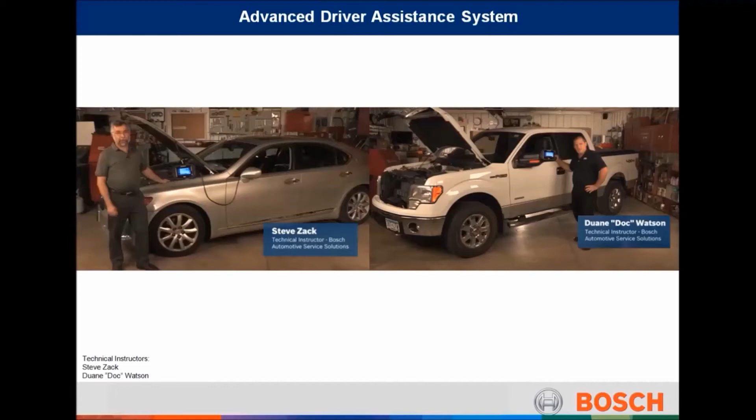Advanced Driver Assistance Systems.

Advanced Driver Assistance Systems, also known as ADAS, are technologies that provide a driver with essential information, automate difficult or repetitive tasks, and lead to an overall increase in car safety for everyone. Some of these technologies have been around for a long time, and they have already proven to result in an improved driving experience and better overall road safety.

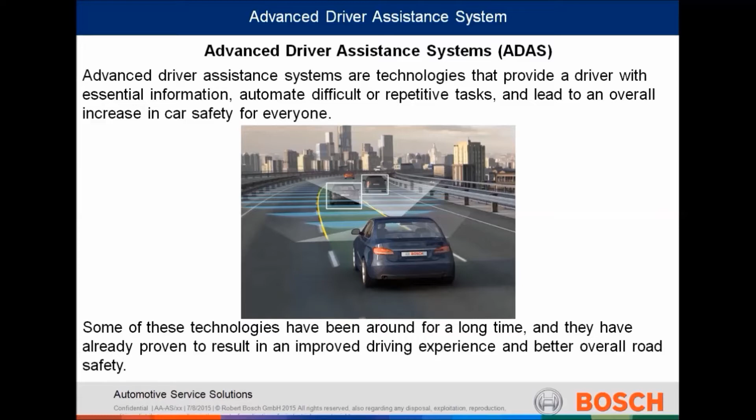ADASs are right on the cutting edge of emerging automotive technologies.

Collision warning and avoidance systems, also known as CWA. A collision warning system operates generally in the following manner. A sensor installed at the front of the vehicle constantly scans the road ahead for vehicles or obstacles. If an obstacle is found, the system will determine whether the vehicle is in imminent danger of crashing, and if so, a collision warning is given to the driver.

The sensors used fulfill the task of obstacle detection and tracking, which is the basis of collision warning sensing techniques.

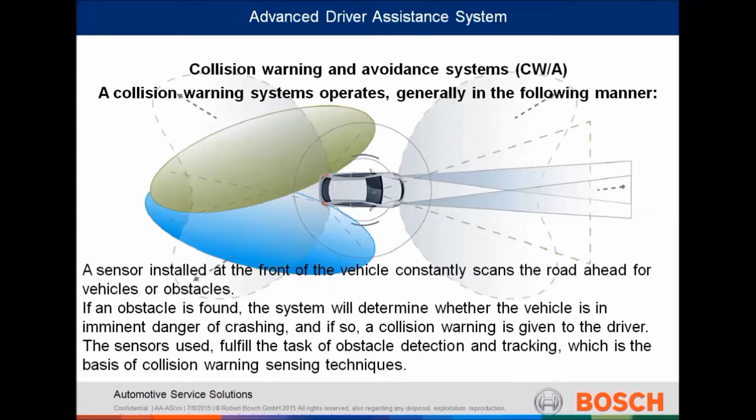Bosch is involved in advanced driver assistance systems, such as adaptive cruise control, adaptive light control, typically referred to by the term Advanced Front Lighting Systems, or AFS, automatic braking, automatic parking, blind spot detection.

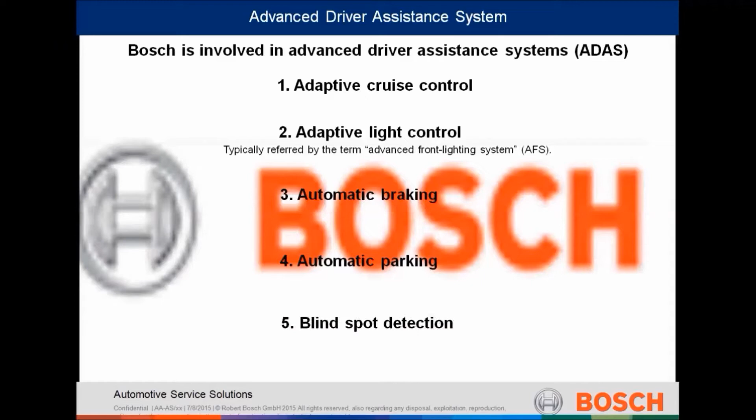Bosch is the world market leader for radar sensors with 77 gigahertz technology. One sensor facilitates several driver assistance systems. With its mid-range radar sensor, Bosch has made radar technology affordable for the general market.

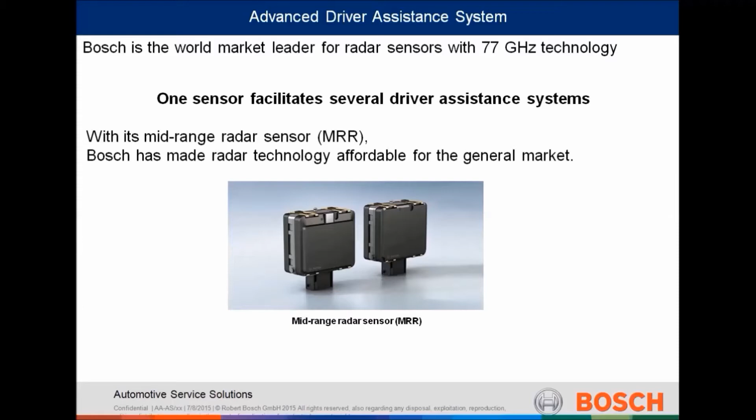The mid-range radar sensor is used, for example, in some VWs, which means that it can be found in the price-sensitive segment for small and compact cars.

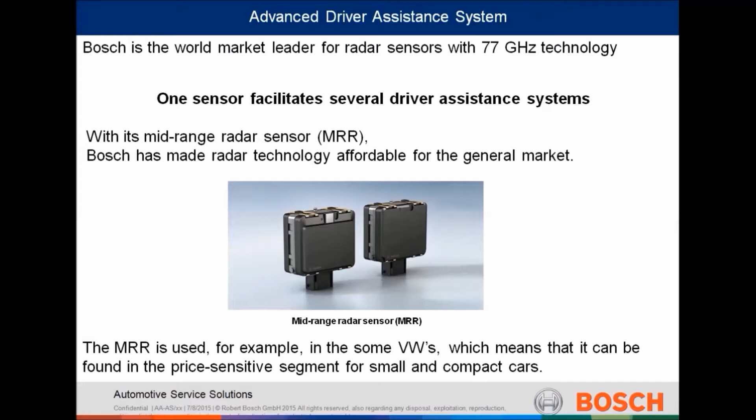Part of the advanced driver assistance systems is the adaptive cruise control. The adaptive distance and speed control system actively assists the driver in keeping a safe distance from the vehicle in front of them. While driving, the adaptive cruise control maintains the speed set by the driver and can automatically adapt this speed to changing traffic by throttling back, braking, or accelerating.

The stop and go version can bring the vehicle to a standstill and will resume automatically when instructed by the driver.

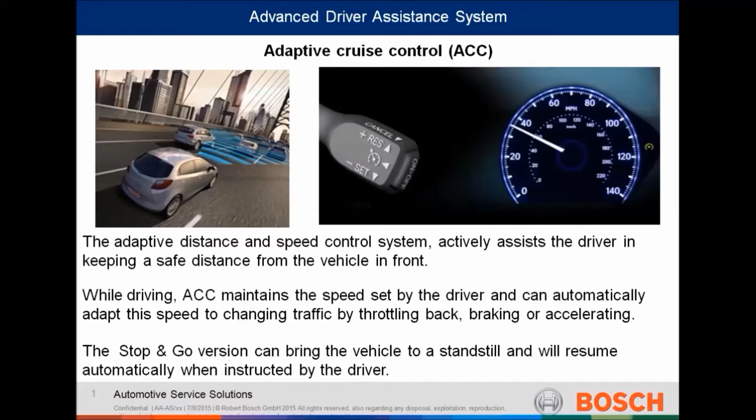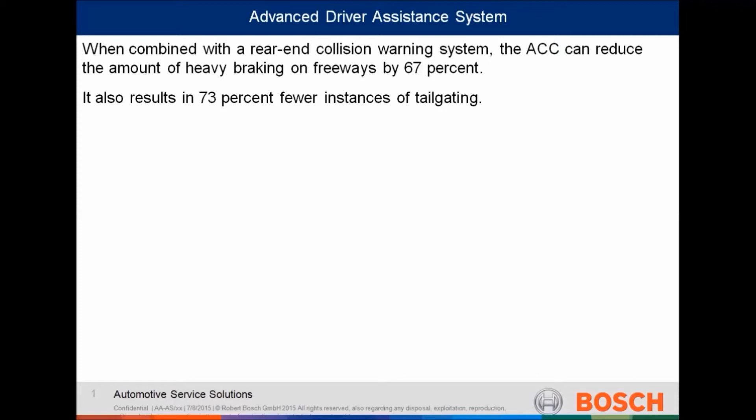When combined with a rear-end collision warning system, the ACC can reduce the amount of heavy braking on freeways by 67%. It also results in 73% fewer instances of tailgating.

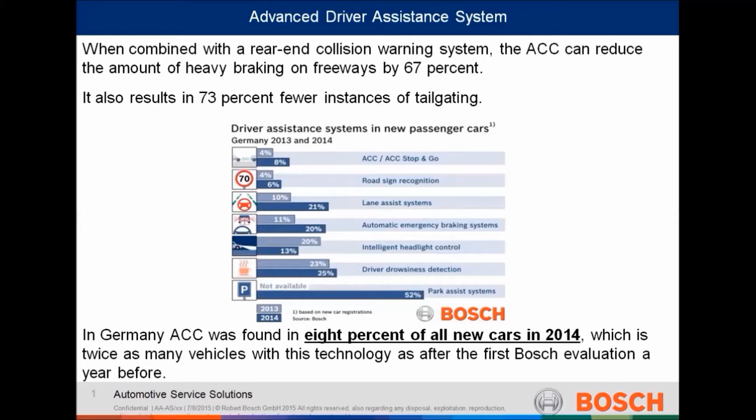In Germany, the ACC was found in 8% of all new cars starting in 2014, which is twice as many vehicles with this technology as after the first Bosch evaluation a year before.

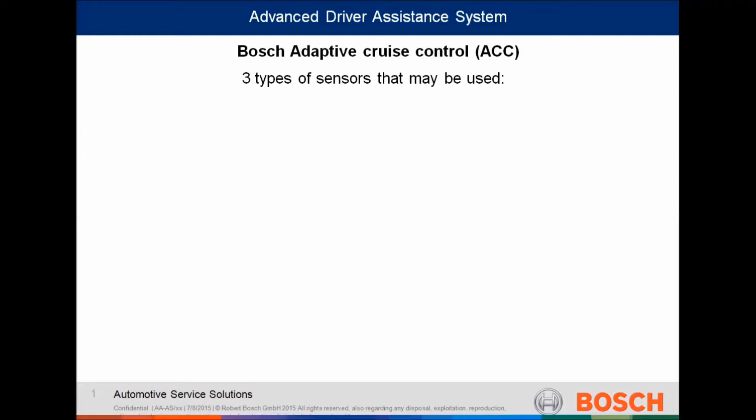In the Bosch Adaptive Cruise Control, there are three types of sensors that may be used. First is the mid-range MRR sensor. The antenna design enables a range of up to 525 feet, or 262 feet to the rear, and a field of view of up to 42 degrees, or 150 degrees to the rear.

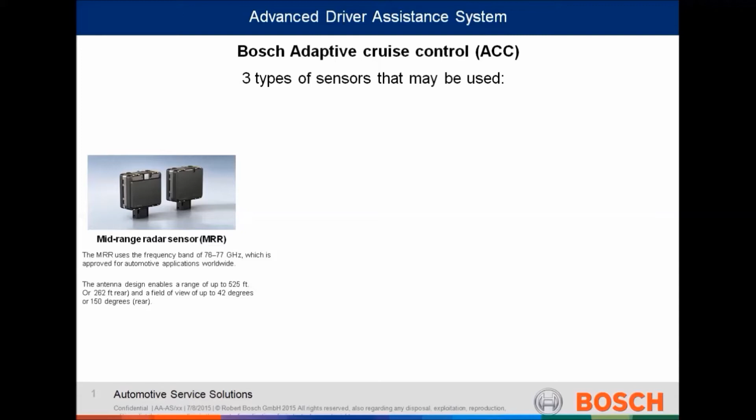Bosch also has the long-range radar sensor, also known as the LRR4. The central 4 antenna feature optimum properties for recording the vehicle's surroundings at high speed. They create a focus beam pattern providing excellent long-range detection with minimal interference from traffic in adjacent lanes. In the near range, the LRR4's outer 2 antenna expand the field of view, making it possible to quickly detect vehicles entering or leaving the vehicle's lane.

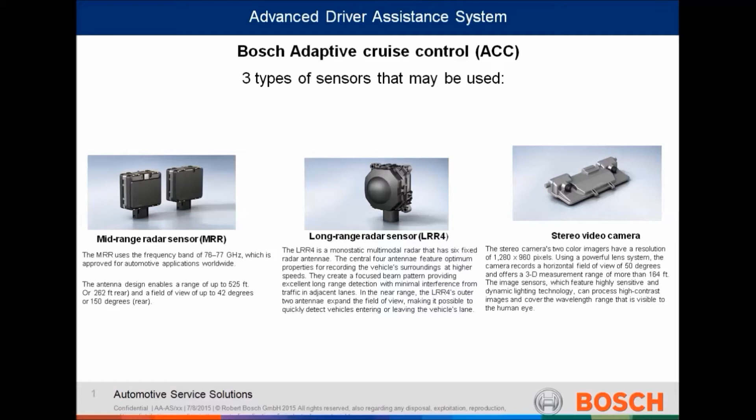The stereo camera's two-color imagers have a resolution of 1280 by 960 pixels. Using a powerful lens system, the camera records a horizontal field of view of 50 degrees and offers a 3D measurement range of more than 164 feet. The image sensors, which feature high sensitivity and dynamic lighting technology, can process high contrast images and cover the wavelength range that is visible to the human eye.

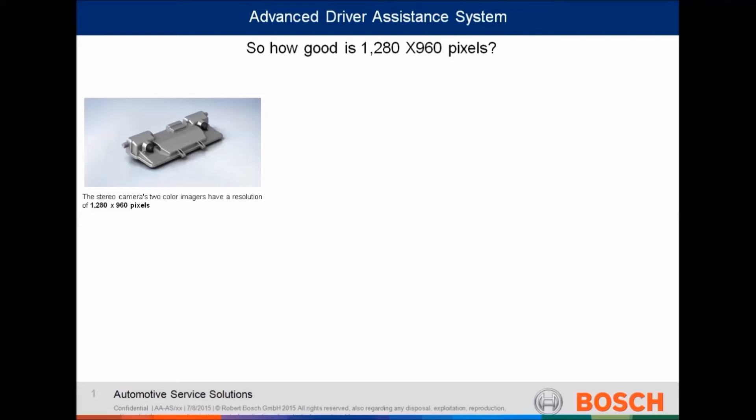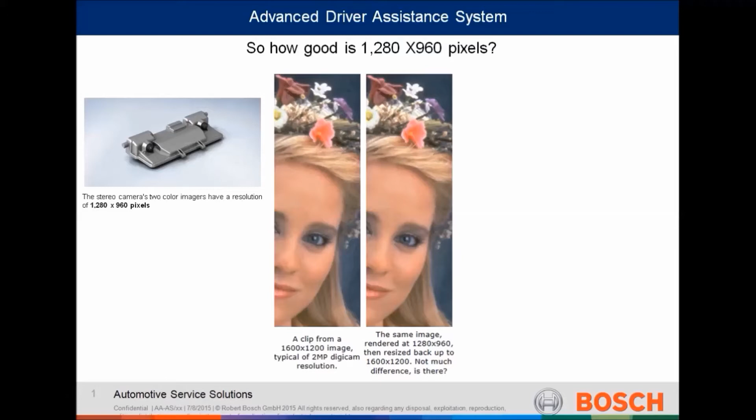This stereo camera's two-color imagers have a resolution of 1280 by 960 pixels. So how good is 1280 by 960 pixels? The picture on the left is a clip from a 1600 by 1200 image, typically that of a 2 megapixel digital camera. The same image rendered at 1280 by 960, then resized back up to 1600 by 1200. There's not much difference, is there?

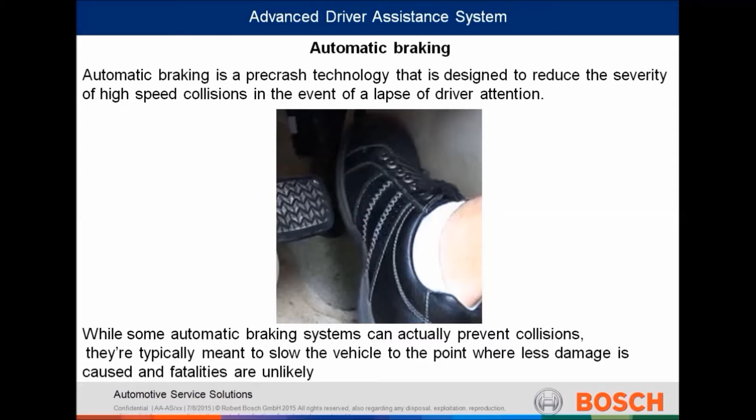Automatic braking. Automatic braking is a pre-crash technology designed to reduce the severity of high-speed collisions in the event of a lapse of a driver's attention. While some automatic braking systems can actually prevent collisions, they're typically meant to slow the vehicle to a point where less damage is caused and fatalities are unlikely.

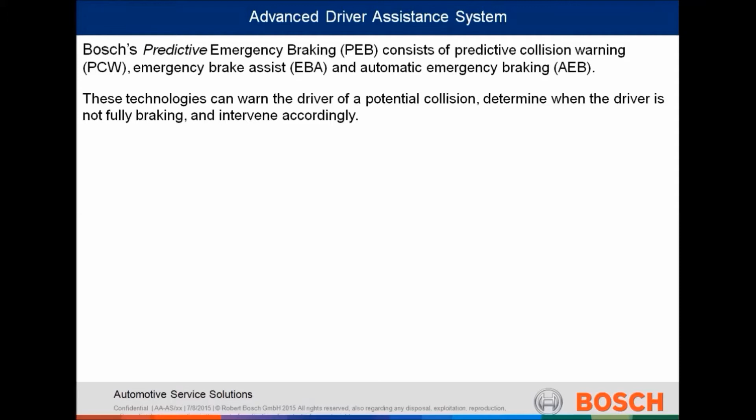Bosch's Predictive Emergency Braking, called PEB, consists of a Predictive Collision Warning (PCW), an Emergency Brake Assist (EBA), and Automatic Emergency Braking (AEB). These technologies can warn the driver of a potential collision, determine when the driver is not braking fully, and intervene accordingly.

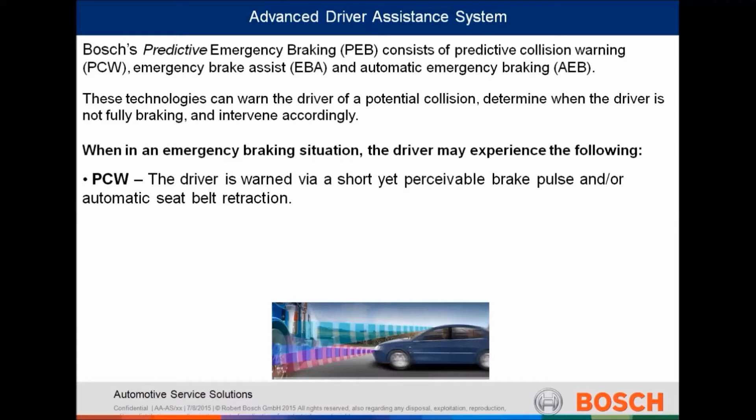When in an emergency braking situation, the driver may experience the following: during predictive collision warning, the driver is warned via a short yet perceivable brake pulse and/or automatic seatbelt retraction.

During emergency brake assist, upon initial partial braking by the driver, the EBA automatically increases the brake pressure to the required level for the given situation. AEB initiates automatic emergency braking if a collision is unavoidable.

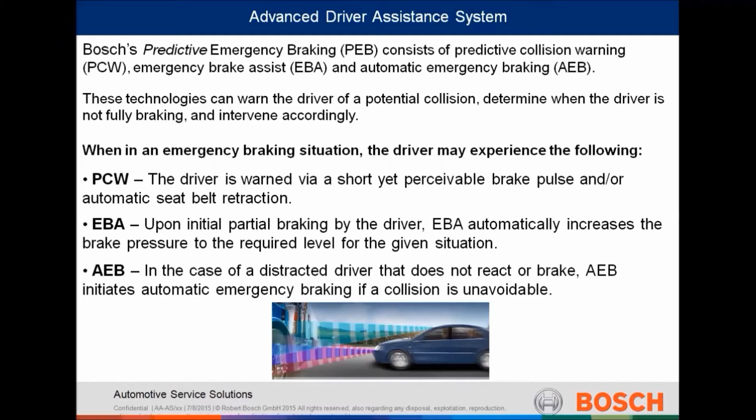Parking assist: an ultrasonic sensor integrated into the side of the front bumper scans the side of the road to detect a suitable parallel or perpendicular space.

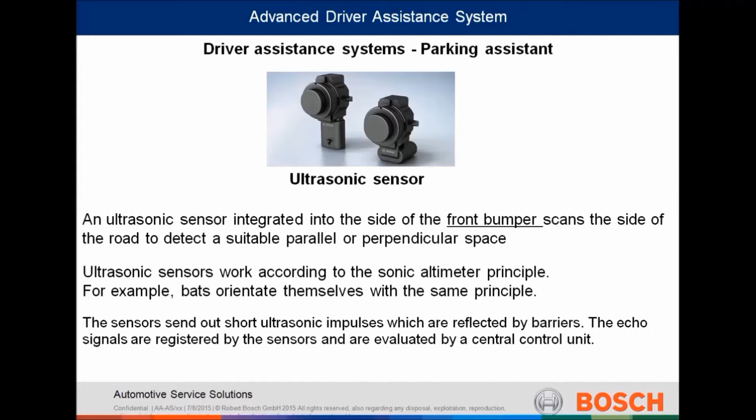Ultrasonic sensors work according to the sonic altimeter principle. Bats orientate themselves with the same principle. The sensors send out short ultrasonic pulses, which are reflected by barriers. The echo signals are registered by the sensors and are evaluated by a central control unit.

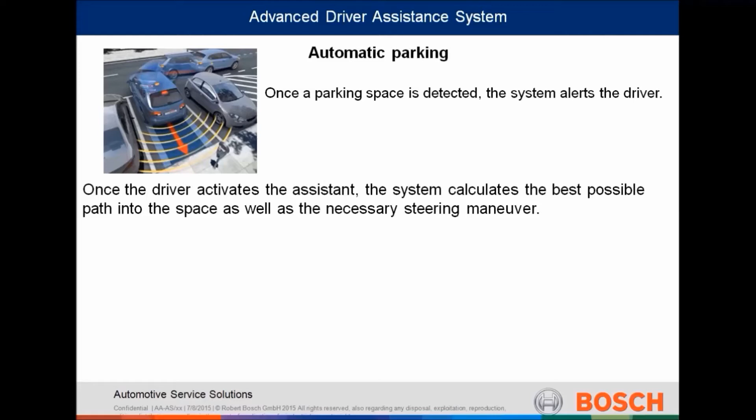Once a parking space is detected, the system alerts the driver. Once the driver activates the assistant, the system calculates the best possible path into the space, as well as the necessary steering maneuver.

Once complete, the parking assistant takes control, allowing the driver to let go of the steering wheel and only control the parking maneuver by accelerating and braking. The assistant also helps with pulling out of the parking space.

Parking assistant technology takes control of all steering maneuvers in order to direct the car into a position from which the driver can safely pull out of the space.

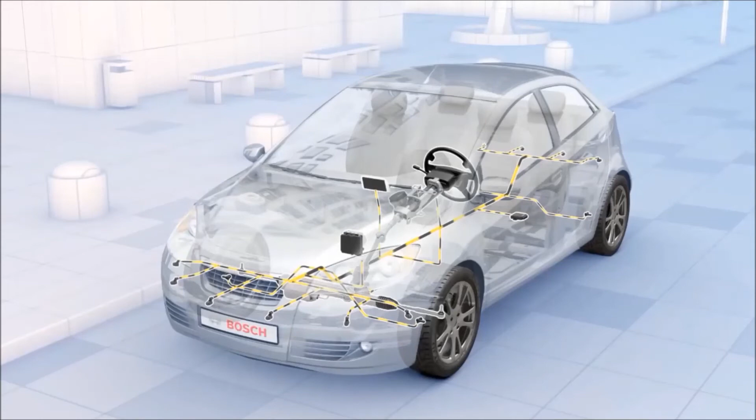Bosch currently produces a wide variety of innovative comfort and driver assistance systems, and without a doubt, park steering control falls into this category.

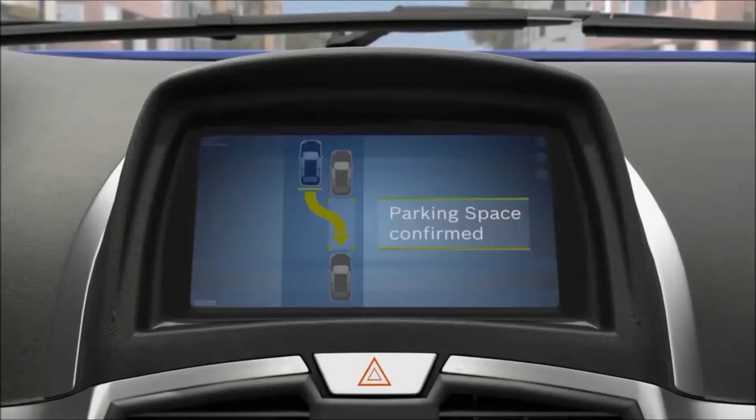An ultrasonic sensor measures the length and depth of a parking space as the vehicle is driving past. As soon as the parking assistant identifies a suitable parking space, everything else is done at the push of a button. The system calculates the best possible approach in split-second intervals and automatically steers the vehicle into the selected parking space.

All the driver has to do is carefully operate the accelerator and brake pedal to maintain control of the vehicle at all times. Several warning stages give the driver constant updates on the remaining distance between the vehicle and an obstacle.

What's more, Bosch has now added functions to make the driving experience even more comfortable and safe, such as the pull-out control.

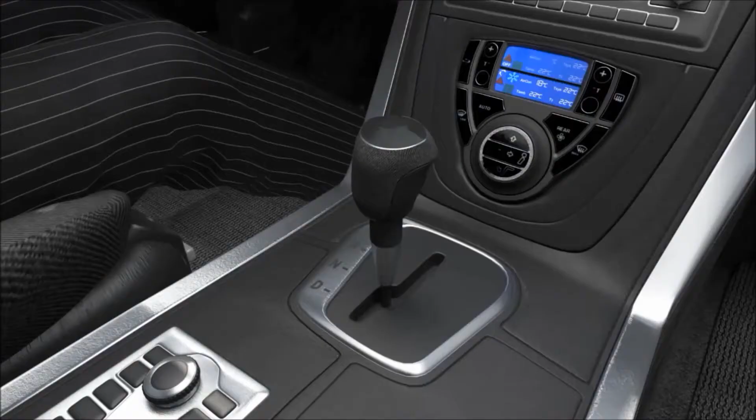After activating the system, the driver simply switches on the indicator to confirm the pull-out intention. The driver can start the maneuver moving forwards or backwards.

The system communicates the required steering angles directly to the electric power steering, which automatically performs all steering moves. The driver's tasks are limited to operating the accelerator and brake pedal and changing gears, so he or she can concentrate fully on the pull-out process.

In the case of a critical approach to adjacent vehicles, a warning signal is emitted from the system. Due to the extremely quick automatic steering moves, in no time at all the vehicle reaches a position which allows it to drive straight out of the space.

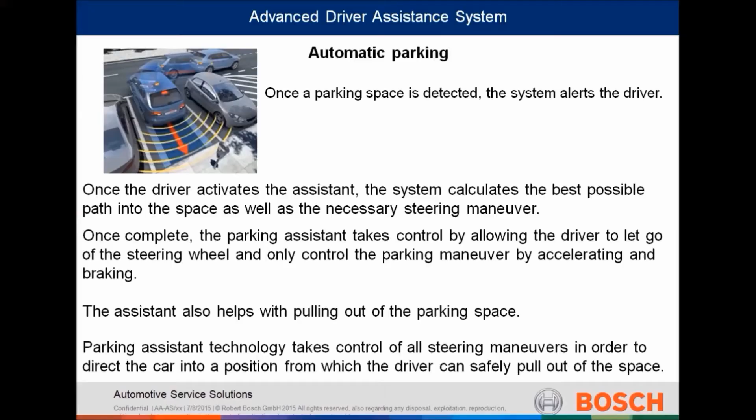A signal then indicates that the driver should resume control of the steering. Blind spot detection: the side view assist is active between 3 to 111 miles per hour.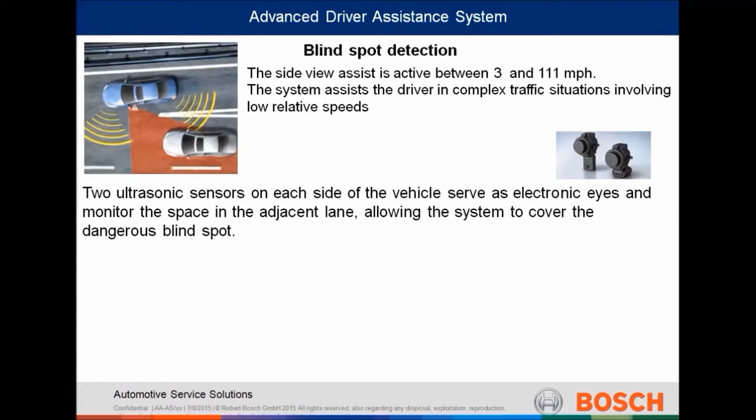The system assists the driver in complex traffic situations involving low relative speeds. Two ultrasonic sensors on either side of the vehicle serve as the electronic eyes and monitor the space in the adjacent lane, allowing the system to cover the dangerous blind spot.

If another vehicle is situated in the monitored area, the driver is alerted to the potential danger by means of a warning sign in the side mirror.

If the driver fails to spot or ignores this warning and activates the turn signal to change lanes, the system can also trigger an audible warning.

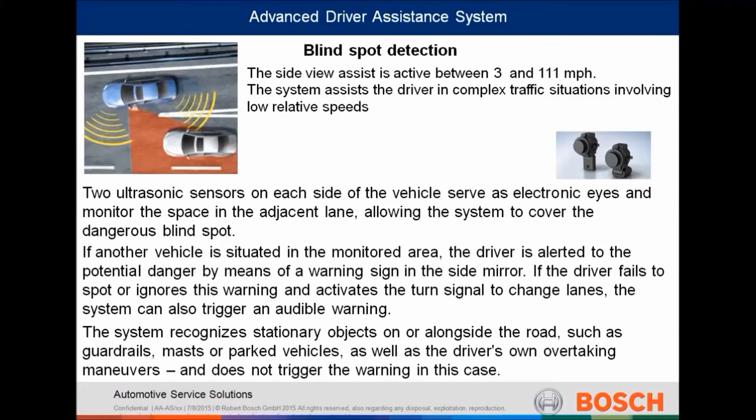The system recognizes stationary objects on or alongside the road, such as guardrails, masts, or parked vehicles, as well as the driver's own overtaking maneuvers, and does not trigger the warning in this case.

Around 5% of all accidents occur during lane changes or overtaking maneuvers because the driver has failed to see an adjacent vehicle in the blind spot area. To improve safety in such situations, Bosch has developed the Side View Assist, the world's first ultrasonic blind spot monitoring system.

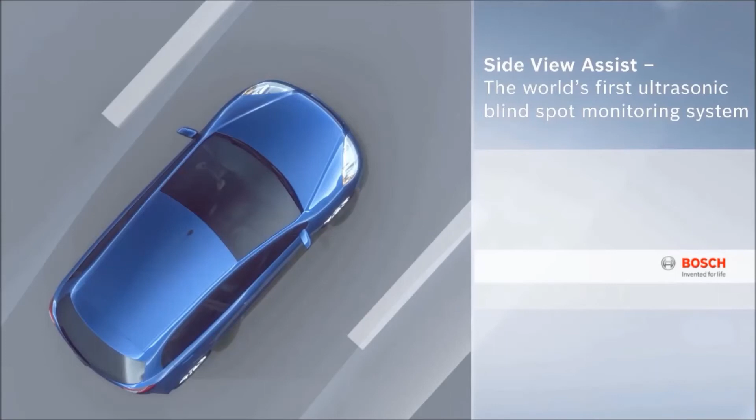Side View Assist employs 4 highly sensitive ultrasonic sensors integrated into both ends of the front and rear bumpers. The sensors monitor the traffic in the neighboring lane in a 3-meter area alongside and diagonally to the rear, covering precisely the dangerous blind spot zone.

The system is activated from walking speed and supports the driver in complex traffic situations at speeds of up to 180 kilometers per hour. It is thus especially suited for use in urban traffic.

As soon as the Side View Assist detects a vehicle moving parallel, an LED warning signal lights up in the side view mirror, gently informing the driver that another vehicle is in close proximity.

If in such a situation, the driver then signals to indicate a lane change, the blind spot monitoring assistant triggers an audible warning as well.

The system informs the driver of vehicles that are overtaking, as well as those already within the blind spot area. Warnings are only given for vehicles that pose a potential risk during lane change. Oncoming traffic, road infrastructure, and vehicles being speedily overtaken are recognized by the system, but do not trigger a warning.

The Side View Assist from Bosch simulates to some degree the over-the-shoulder check, and thus supports the driver in safely maneuvering a vehicle through the complexities of everyday traffic.

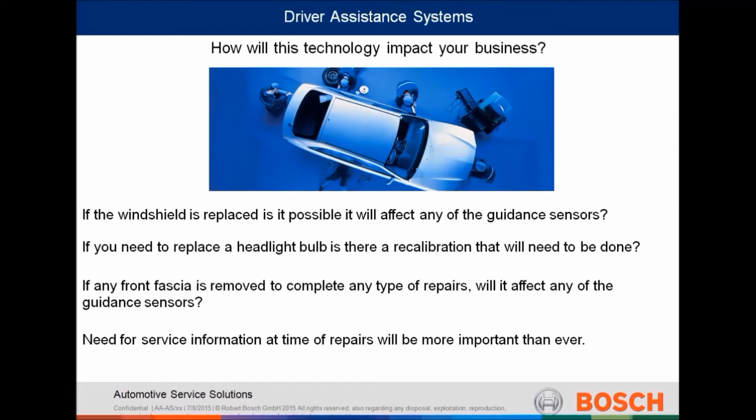If you need to replace a headlight bulb, is there a recalibration that will need to be done? If any front fascia or side panels are removed to complete any type of repairs, will it affect any of the guidance sensors? Need for service information at time of repairs will be more important than ever.

Every body shop knows to check the dashboard for lights before delivering the vehicle to the customer. The collision industry has relied on this method for decades, but that is no longer adequate for many reasons, including more systems equals more lights. Trying to decode and find the fix for a light without the proper equipment is nearly impossible.

More complex systems mean more complex repairs. Fewer and fewer simple fixes for dashboard lights exist. These systems may require a module reset.

Many systems don't show on a dashboard. This can lead to delivering a car with certain systems not working, such as air conditioning, which leads to an irate customer and longer, more expensive repairs.

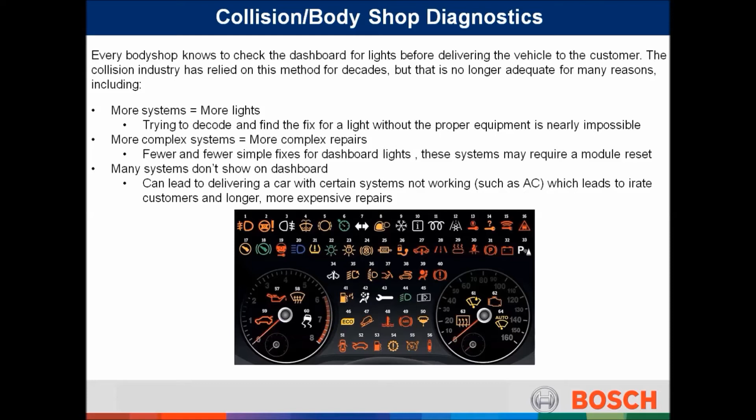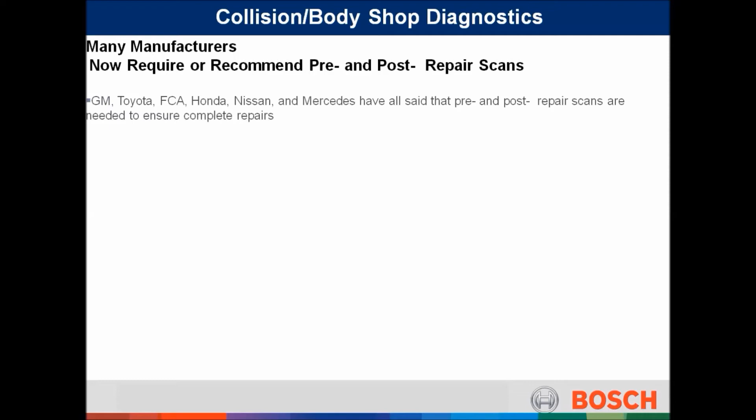Many manufacturers now require or recommend pre and post repair scans. General Motors, Toyota, Fiat Chrysler, Honda, Nissan, and Mercedes have all said that pre and post repair scans are needed to ensure complete repairs.

Those 6 manufacturers sold over 11,300,000 vehicles in 2016. This number represents 65% of the 17,500,000 vehicles sold in 2016. Every collision shop will need to repair these vehicles according to the manufacturer's procedures.

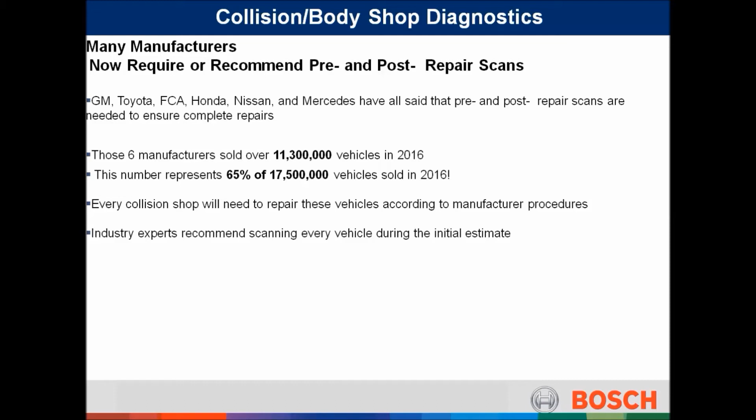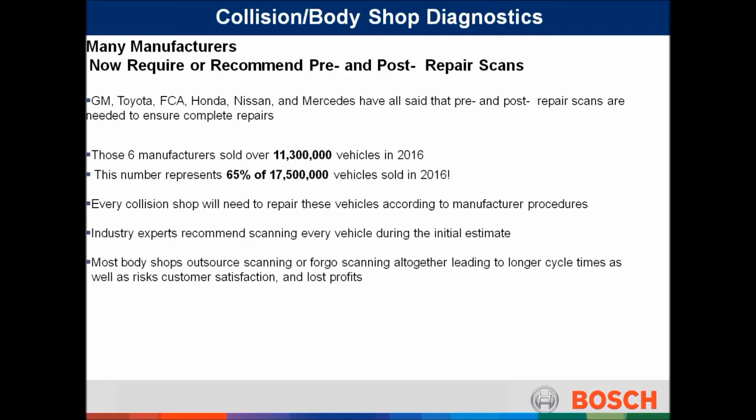Industry experts recommend scanning every vehicle during the initial estimate. Most body shops outsource scanning or forego scanning altogether, leading to longer cycle times as well as risk to customer satisfaction and lost profits.

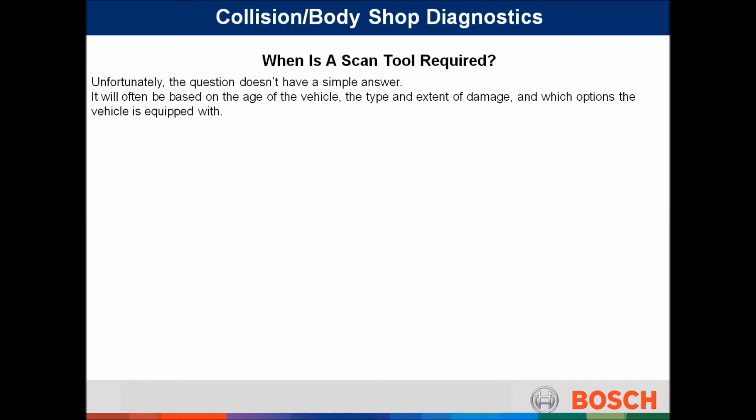When is a scan tool required? Unfortunately, the question doesn't have a simple answer. It will often be based on the age of the vehicle, the type and the extent of the damage, and which options the vehicle is equipped with.

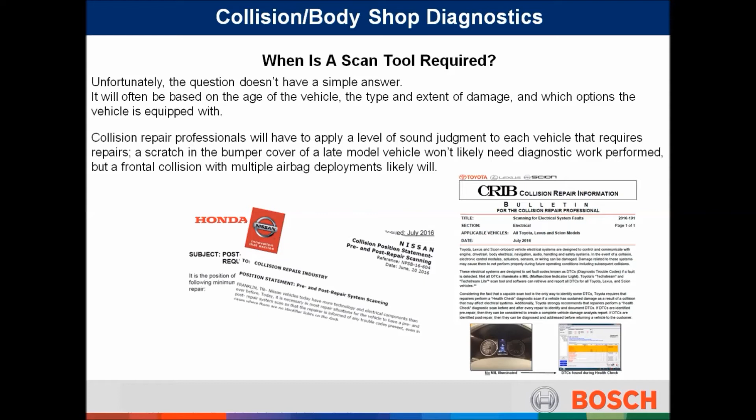Collision repair professionals will have to apply a level of sound judgment to each vehicle that requires repairs. A scratch in the bumper cover of a late model vehicle won't likely need diagnostic work performed, but a frontal collision with multiple airbag deployments likely will.

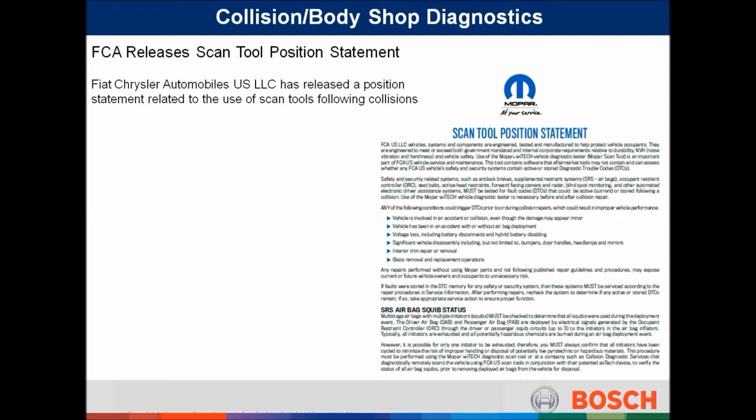Fiat Chrysler released their position statement related to the use of scan tools following collisions. This was posted June of 2016. According to Fiat Chrysler, there are a number of conditions that could trigger diagnostic trouble codes prior to or during collision repairs.

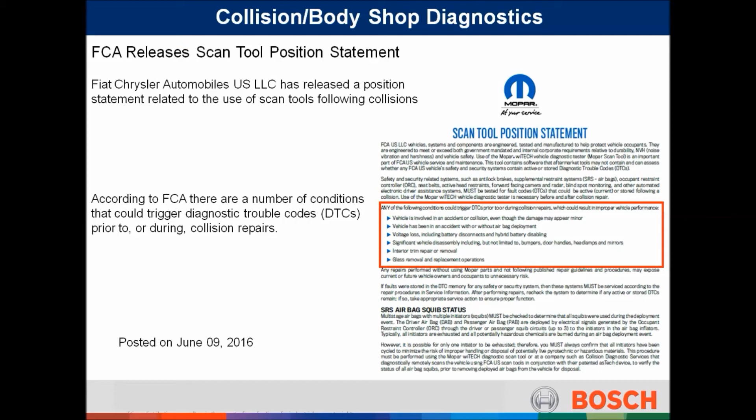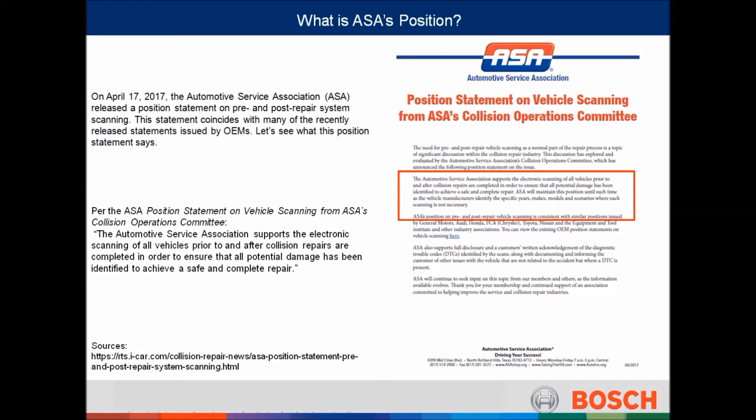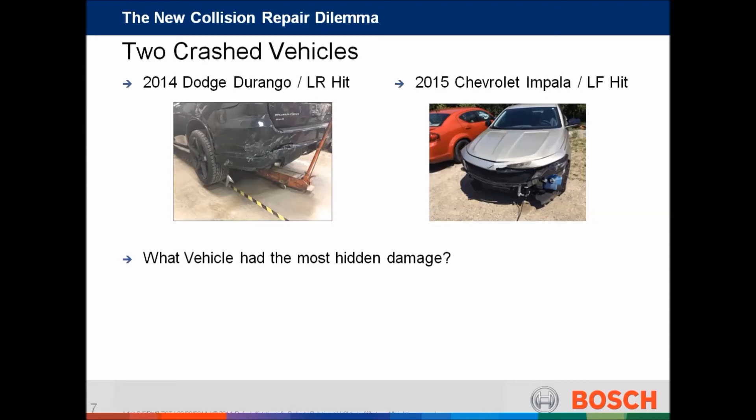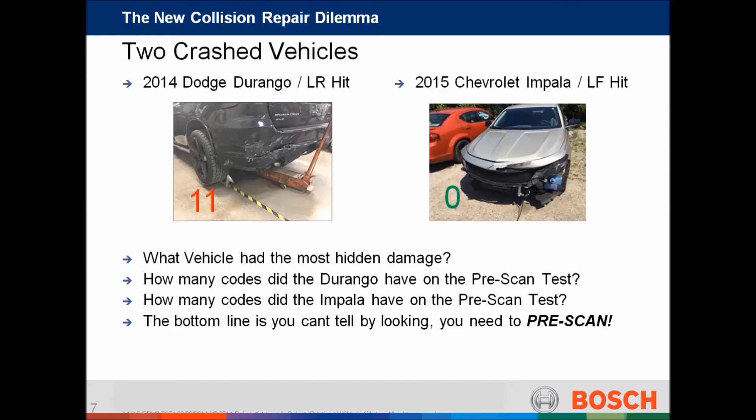Remember, Fiat Chrysler Automobile stated any of the following conditions could trigger DTCs prior to or during collision repairs, which could result in improper vehicle performance. Now check these out: if a vehicle is involved in an accident or collision, even though the damage may appear minor, the vehicle has been in an accident with or without an airbag deployment, voltage loss, including battery disconnects and hybrid battery disabling.

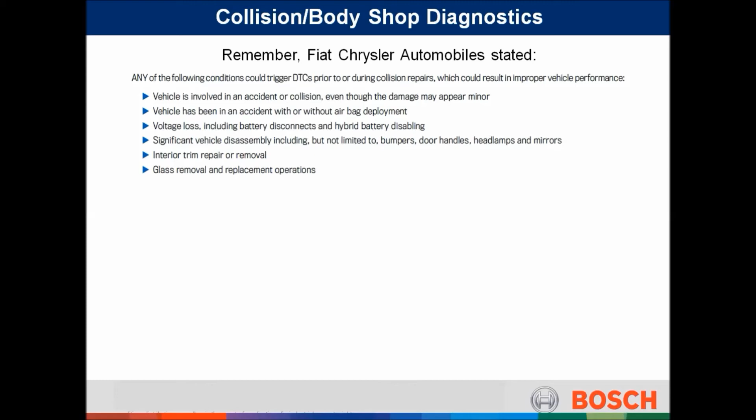Significant vehicle disassembly, including but not limited to bumpers, door handles, headlamps, mirrors. How about interior trim repair or removal? What about glass removal and replacement operations? Is this a game changer for the collision body shops?

Here's where the OEs stand on pre and post scans. There are the 6 manufacturers that we just talked about and where they stand for pre and post scans.

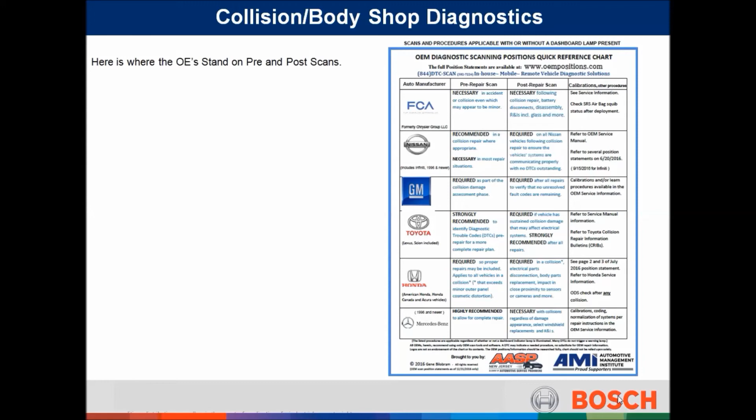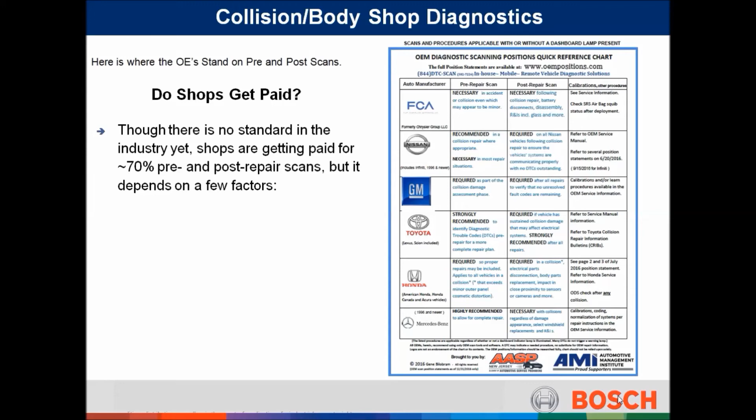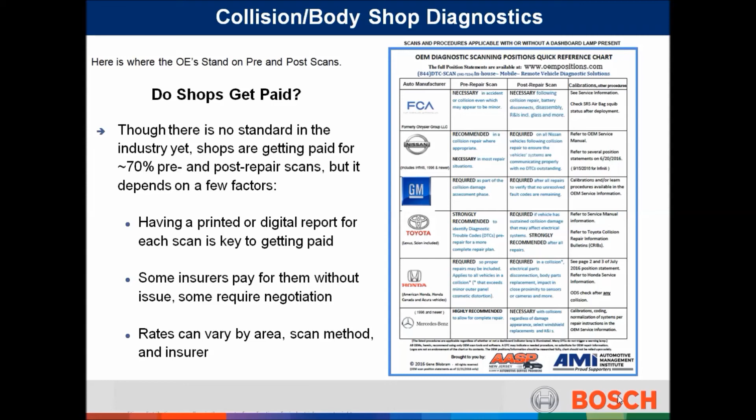Now the next question you're probably going to ask: do shops get paid? Though there is no standard in the industry as of yet, shops are getting paid for about 70% of the pre and post repair scans, but it depends on a few factors. Having a printed or a digital report for each scan is key to getting paid. Some insurers pay for them without issue, some require some negotiation, and rates can vary by area, scan method, and even the insurer.

Now that we know what the OEMs are recommending or requiring us to do, what equipment and training will shops need?

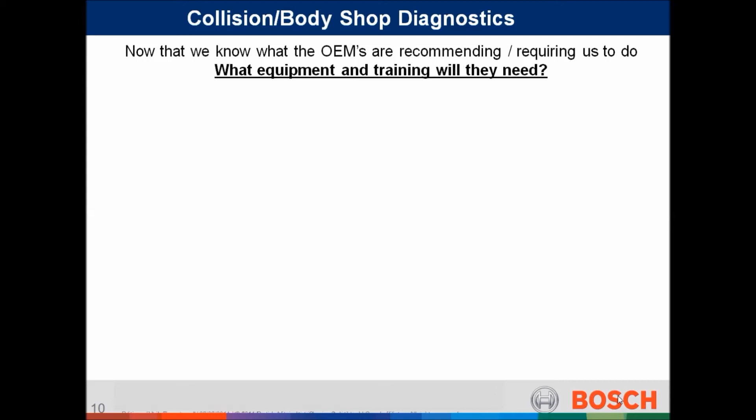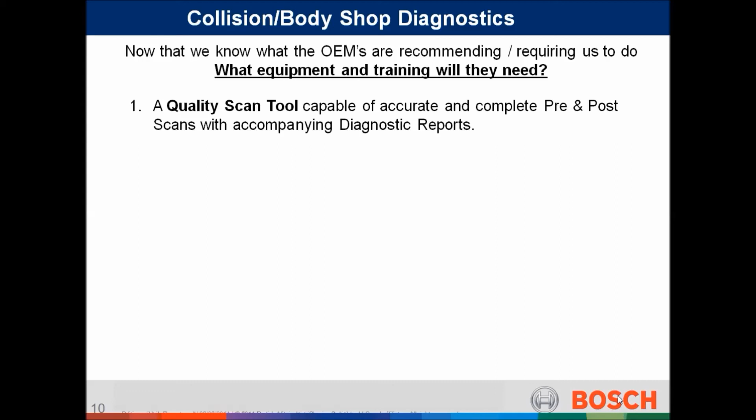Number one, you're going to need a quality scan tool that's capable of accurate and complete pre and post scans with accompanying diagnostic reports. Two, you're going to need a battery maintainer or a high-end battery jump box. You can't accurately scan a vehicle that has a weak battery.

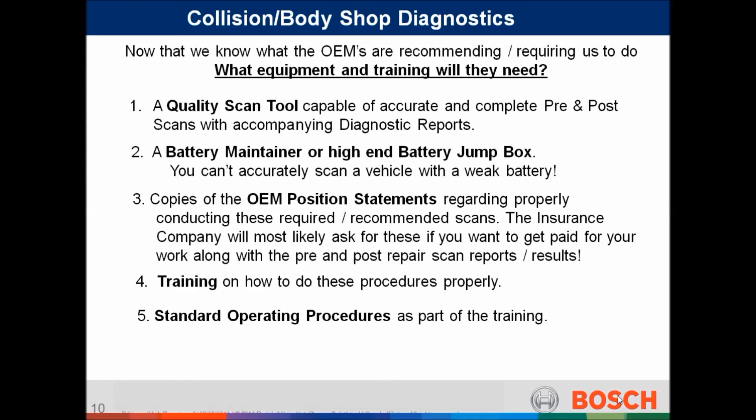And possibly you'll want copies of the OEM position statements regarding properly conducting these required recommended scans. The insurance company will most likely ask for these if you want to get paid for your work, along with the pre and post repair scan reports or results. And then training on how you do these procedures properly, and you'll also want a standard operating procedure as part of your training procedures for your shop.

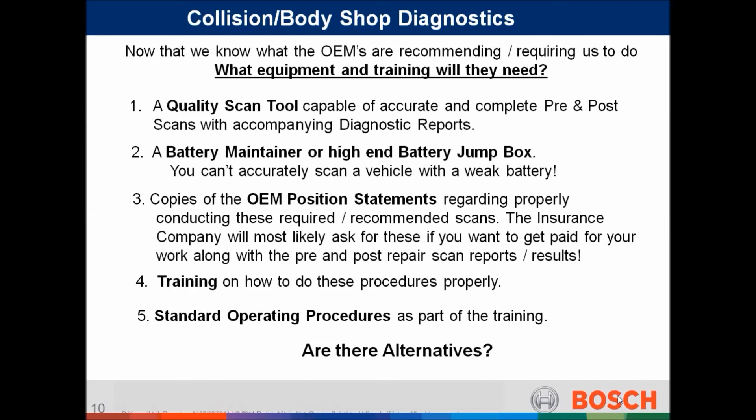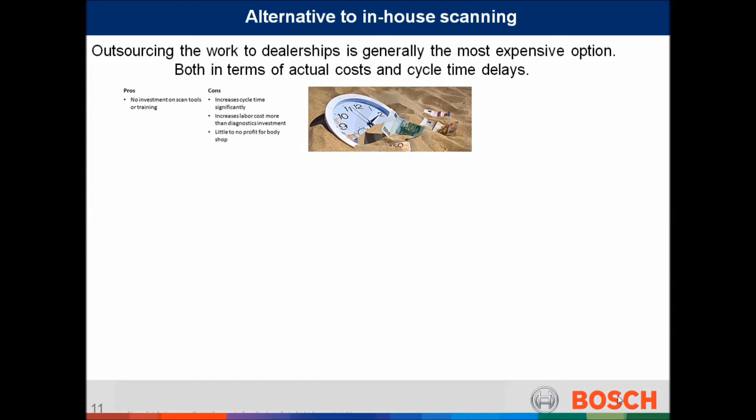Are there alternatives to all this? Yes. Outsourcing the work to dealerships is generally the most expensive option, both in terms of actual cost and cycle time delays. The pros: you've got no investment on scan tools or training. The cons: increase cycle time significantly, increase labor costs more than diagnostic investment, and then little to no profit for the body shop.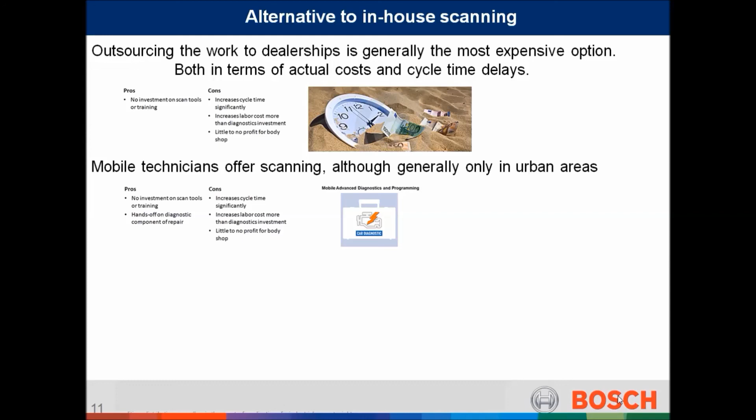Next might be using mobile technicians, because they offer scanning, although generally only in urban areas. The pros: again, no investment on scan tools, and number two, hands-off diagnostic component of the repair. The cons: increase cycle time significantly, increase labor cost more than diagnostic investment, and little to no profit again for the body shop.

Remote scanning, where off-site technicians scan vehicles hooked up at the shops via the internet. This may be a great solution, but it's very expensive. The pros: minimal training required for your technicians, it decreases cycle time versus outsourcing, and it has a low initial investment for scan tools.

Cons: it has a limited ability, can only scan, clear, and report. There's going to be an extra investment needed for system repairs. This can take an hour or more on a busy day. The charge per scan lowers profitability, and it has a much longer return on investment.

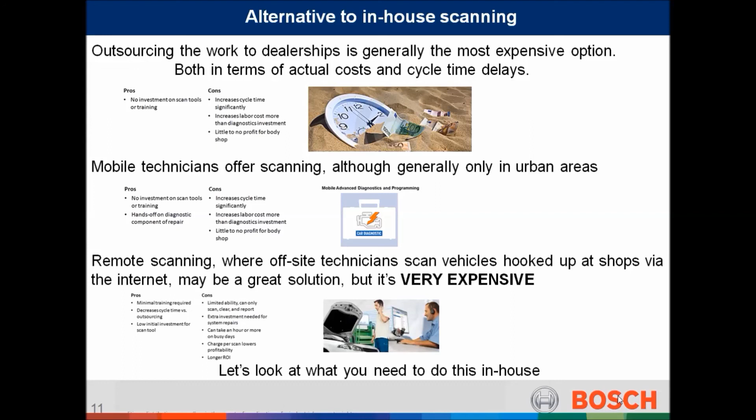Let's look at what you need to do this in-house. So, body shops investing in the diagnostic tools. Pros: lower equipment investment than remote services, you have the ability to fix most issues right then in-house, has the highest profitability and the fastest ROI, and it's the fastest pre and post repair scans or repairs.

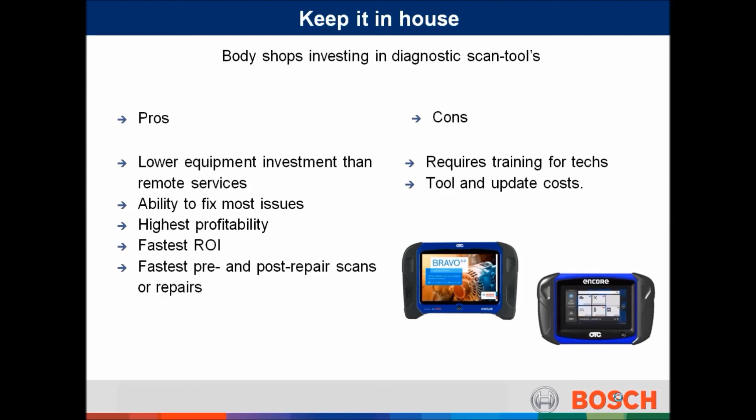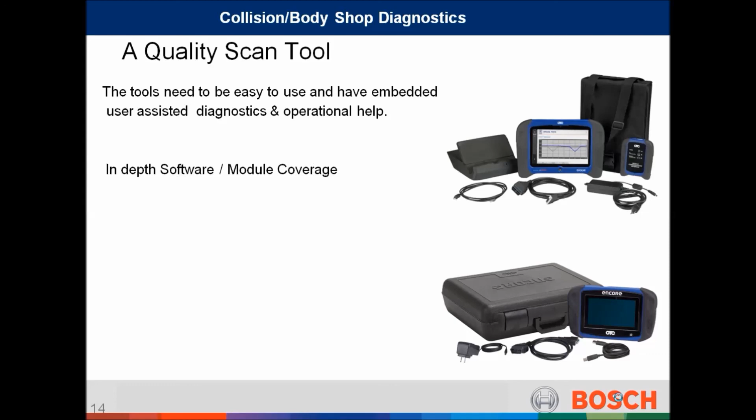Cons: it requires training for technicians, and then of course you've got tools and update cost. The tools need to be easy to use and have embedded user-assisted diagnostics and operational help. It must have in-depth software and module coverage.

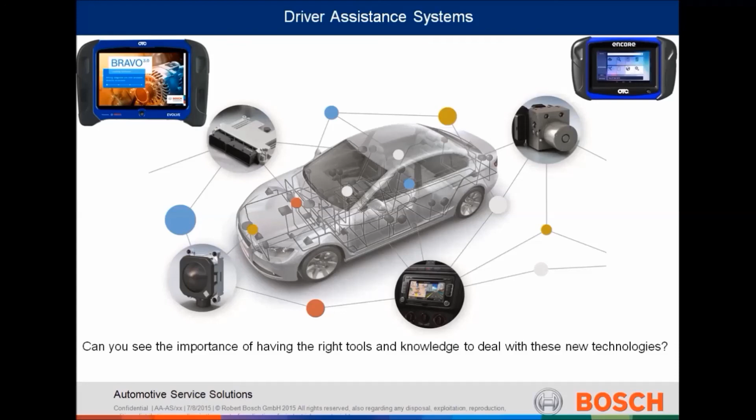Can you see the importance of having the right tools and knowledge to deal with these new technologies?